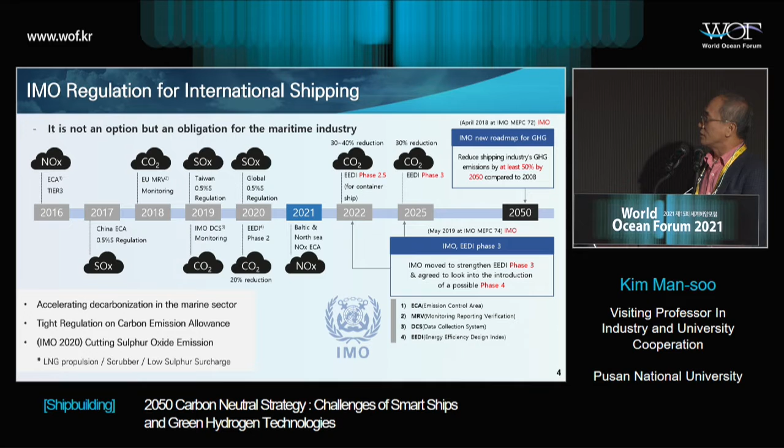This is about IMO regulation. Since Korean Register's Director Song elaborated on this matter, I can skip this slide. One point I'd like to highlight is that IMO regulation is not an option, this is a must. This is mandatory, so you have no exception other than complying with this regulation.

In February this year, there was an IMO alternative fuel symposium held virtually because of COVID-19, with intensive discussion on alternative fuels, as you know all too well: hydrogen, green methanol, green ammonia, and biofuel. These four types of fuels were discussed as alternative fuel options.

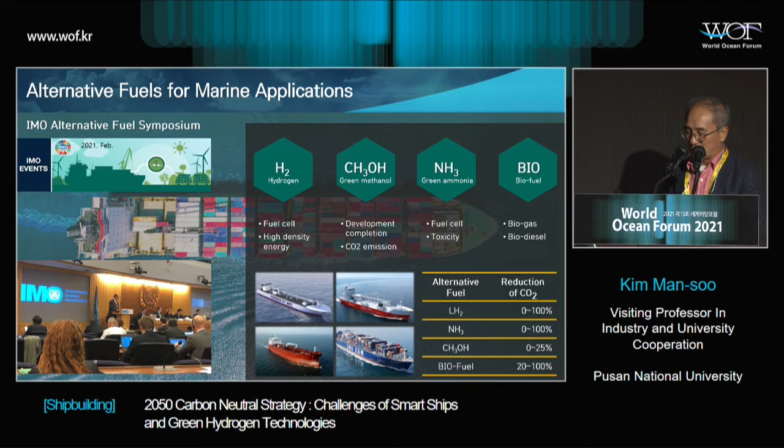As you can see on the table, those four fuels were discussed because they can achieve significant carbon dioxide reduction.

Nations around the world are researching alternative fuel options, and some have already conducted demonstrations. Norway and France have flagship projects, Danish company Maersk is piloting with biofuel, and the United States is testing hydrogen fuel and biofuel. As for Korea, we are testing and developing various next generation fuel options.

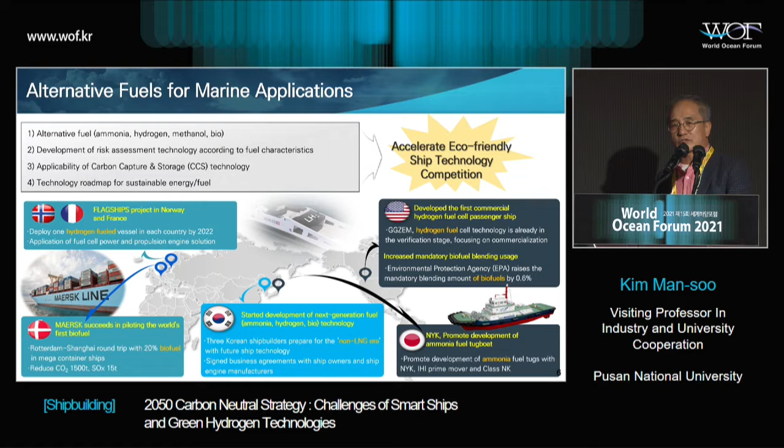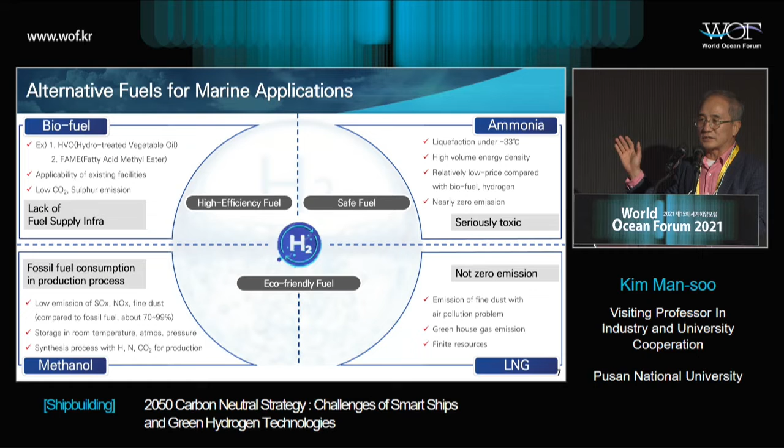If you put this all together, then you have the basis for producing hydrogen. We are in a transitioning period to move into full-fledged hydrogen fuel.

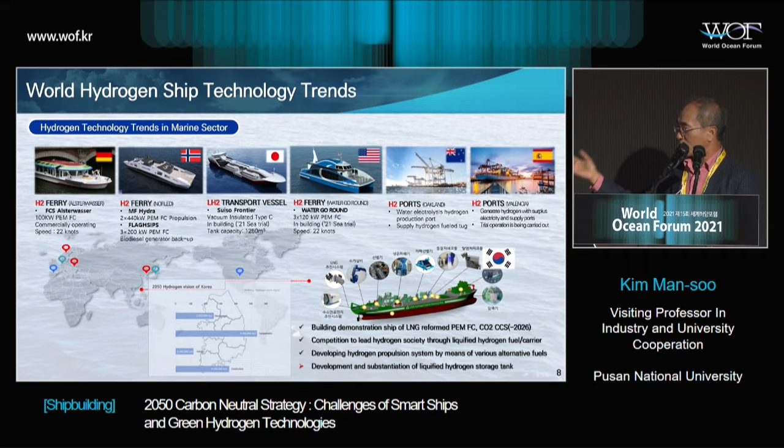As for H2 ports, we can see examples in the United States and Spain, and in Korea at my university, Pusan National University. The plan is to build this vessel by 2026. It uses PEM-FC and has a CO2 capture system as well. This plan is currently underway.

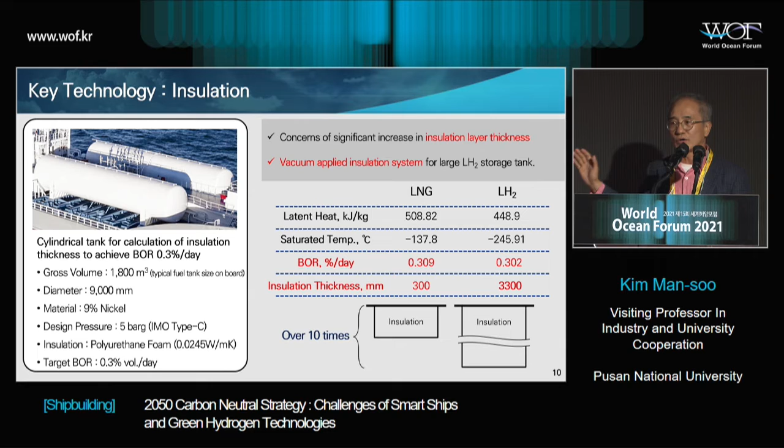If you apply these characteristics to liquefied hydrogen, the insulation thickness would need to be 3,300 millimeters. In this case, this is not viable and not feasible at all. This is very fundamental research that was done.

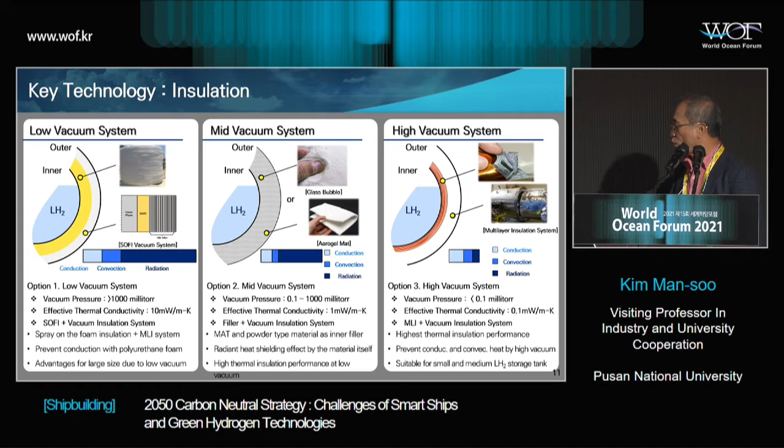The last one is the high vacuum system. The vacuum pressure would be less than 0.1 millitorr, and the conductivity would go as low as 0.1, so high thermal insulation performance would be fully utilized to prevent conduction and convection heat. This is suitable for small sized storage tanks.

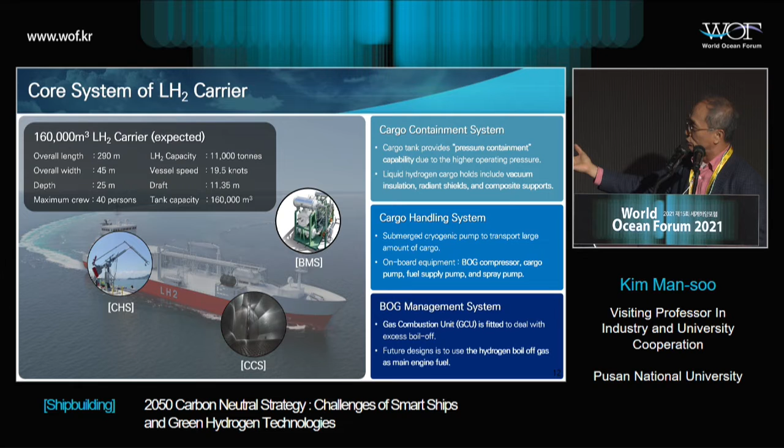The overall trend is more or less the same as with LNG, but the temperature is about 100 degrees Celsius lower, so this is to see whether they can work properly. It has a BOG management system and cargo handling system, as well as the cargo containment system. These are the areas of potential research going forward.

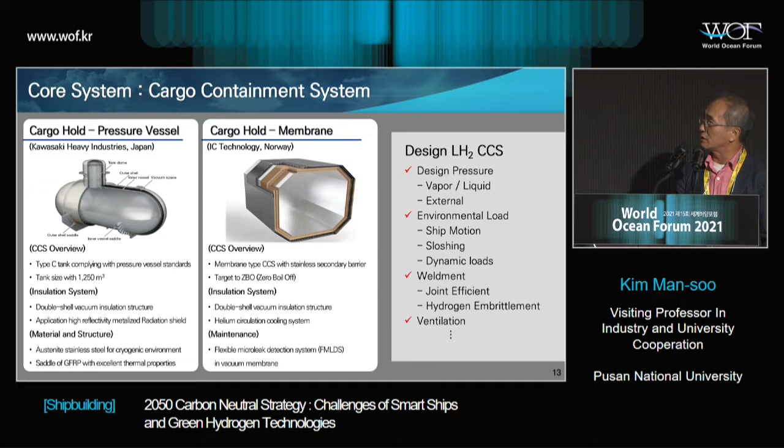This was done by Norwegian IC Technology. This is a membrane type. For the CCS, it uses stainless steel. The target is zero boil off. As for the insulation system, it introduced a double shell vacuum insulation structure and helium circulation cooling system. These are under demonstration stage or development stage.

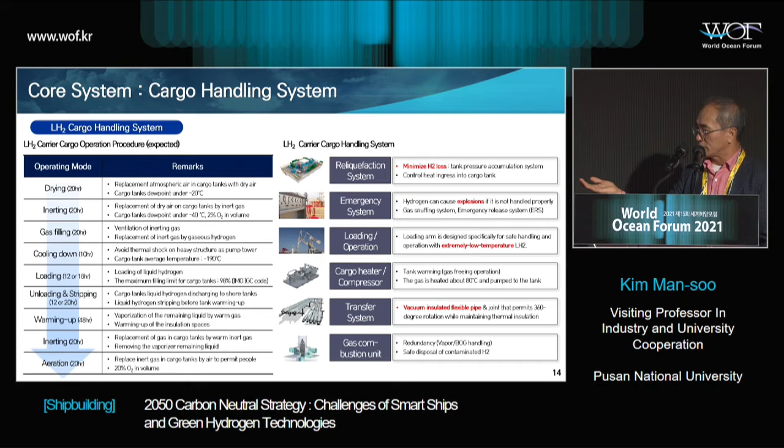This also needs to include the cargo heater, compressor, and transfer system, because all the pipes need to be vacuum insulated and double pipe needs to be implemented for insulation. Last but not least, a gas combustion unit is also required for cargo handling.

The next one is BOG handling or BOG management. Just like LNG, liquefaction is required, but nitrogen is used for LNG. In case of hydrogen, cold helium would be used for primary cooling. This is for the re-liquefaction.

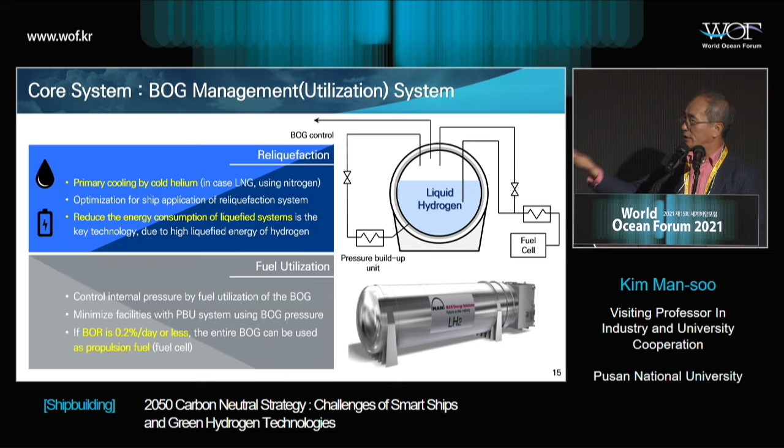There should be another type of research required to minimize the energy consumption of the liquefaction system. As for the boil off gas, this should be able to be utilized for fuel, or it should be able to be recycled. So this is the diagram that captures that idea.

I'd like to turn to the hydrogen economy development plan by the Korean government. As for the hydrogen roadmap, the government's goal is to scale up hydrogen production and to establish industry infrastructure and the supply chain, and then to scale up the supply chain of hydrogen.

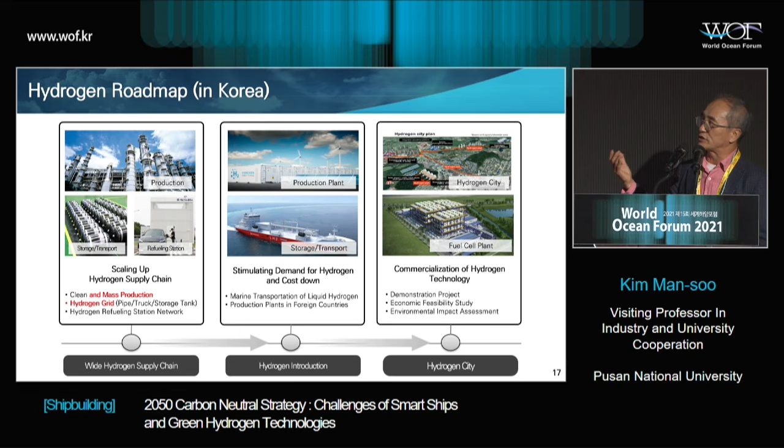The government is also aimed at reducing the cost for production plants as well as for storage and transportation, so that mass transportation will become affordable and available. The last pillar would be to build a hydrogen city with a hydrogen fuel cell plant, with fully commercialized hydrogen technology throughout the society. So this is a blueprint set forth by the government.